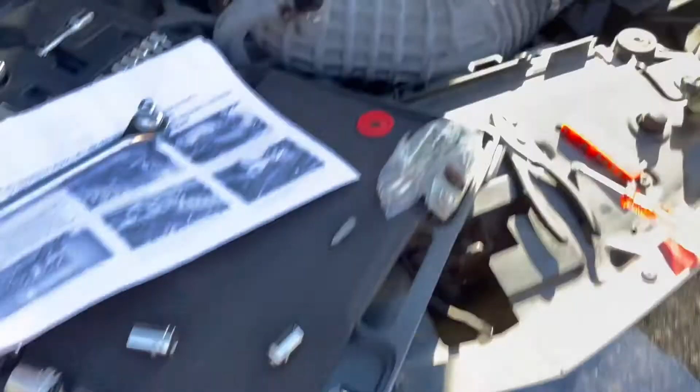So the first thing we're gonna do is take out the clamp, and you gotta do this, just like this. There's two clips, one right here and then the other one right here. That's the third step.

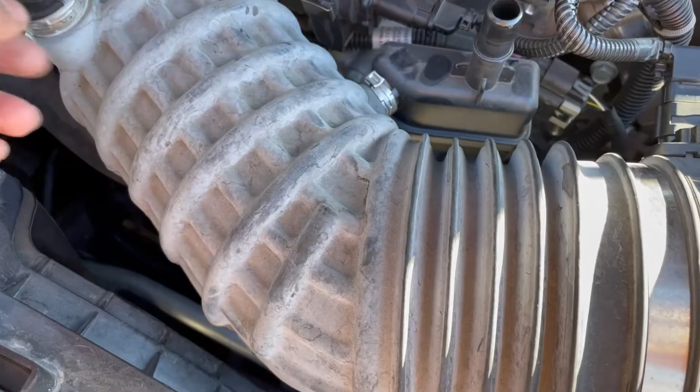Oh, this one, and then after that you get a wrench, this I call it a wrench. You gotta put it right there.

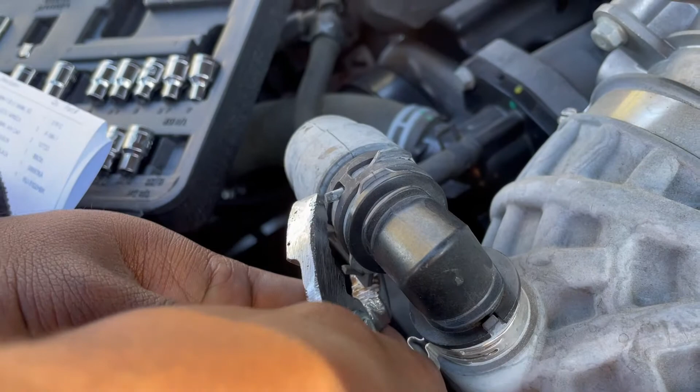It's easy when you get two people together. So he does that, and then I pull it out. There you go, it's going out. Go, there you go.

And then the next step, we're gonna get one of those little T20s, and we're gonna start taking off the air sensor.

I'll show you. We don't have the wrench, that's why, huh?

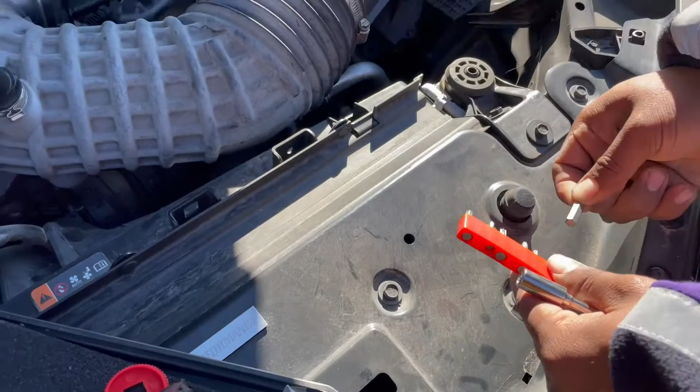Okay, hold up. So now you need a straight one. Now we need a straight one.

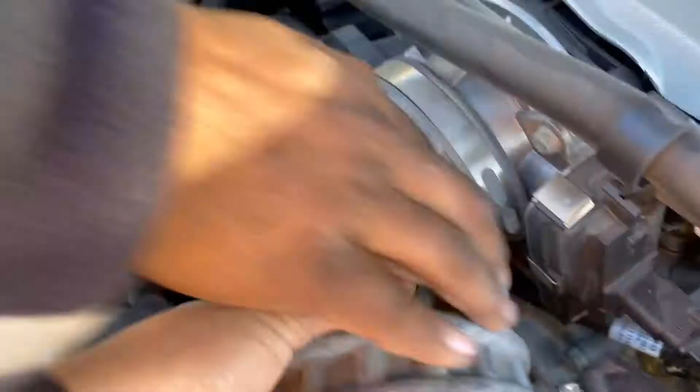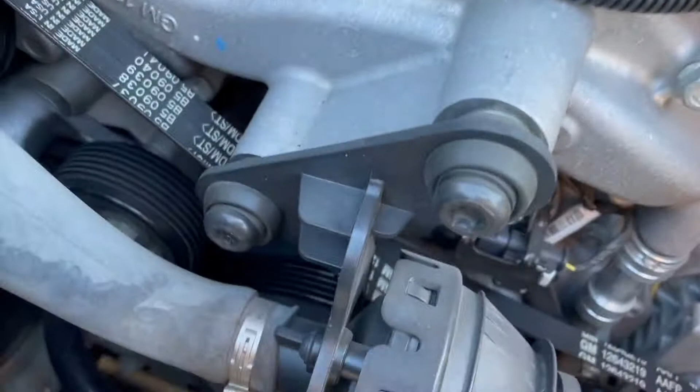So the next step, we're gonna take those two screws right here, get rid of on the engine.

Alright, you have to clip this. There you go. All I have to do is pinch this, pick up the thing a little more up, and then it comes out, because this is basically connected to this. And it doesn't let it come out. See? Because it's not even broken. It's not broken now. So the next step is...

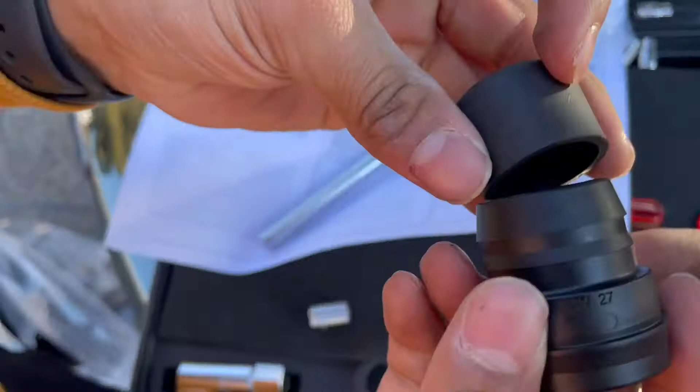The next step, we gotta put in the sound tube. So this is what we have to put together like that. We'll put it in because it has to be the sound tube.

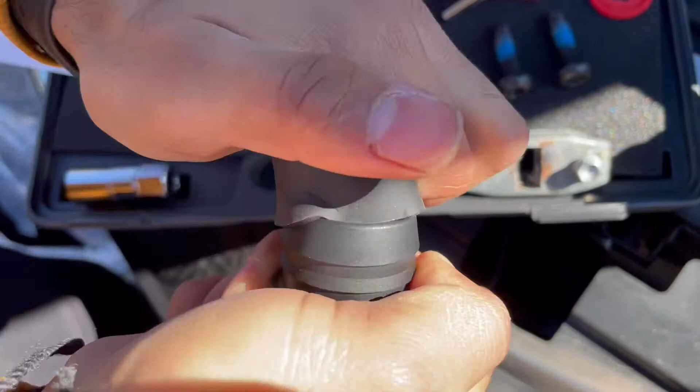It has to come in. There you go. And then you put it right there. Put it in here.

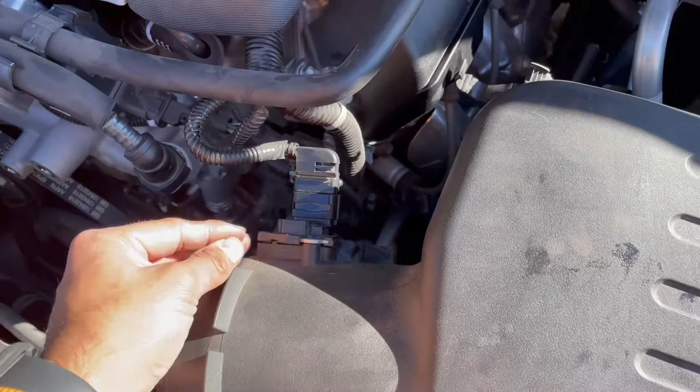So now the next step, we're gonna take off the intake, the whole thing. So once we take the intake off, that's gonna give us a chance to take the sensor off, because it's kind of hard if you just take it off like that. We don't want to damage it. So that's why we're gonna take this out first.

This is pretty helpful when you have a power tool. I'll take this out real quick. Yeah, about to come out. It's already out. It's helpful because your thing doesn't break.

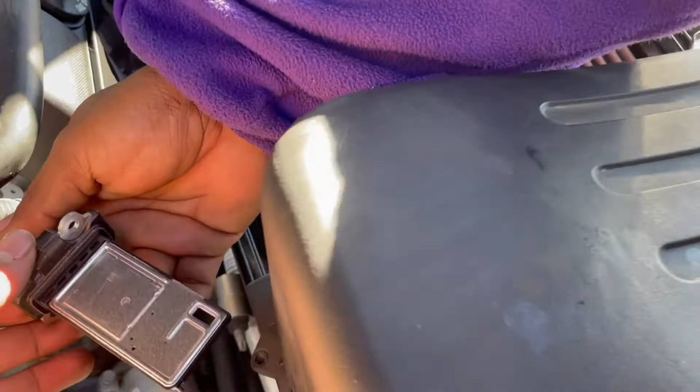So next step, we're gonna have to install the... oh, we're gonna have to take this off first. We gotta take off the cold air intake first and take the sensor out. Just leave it on top here. Okay, we'll leave it. No, we can just leave it hanging. Sure, alright, we'll leave it hanging, the sensor.

So this is the one we take off. Now we gotta take this off too. We have to take the whole thing off.

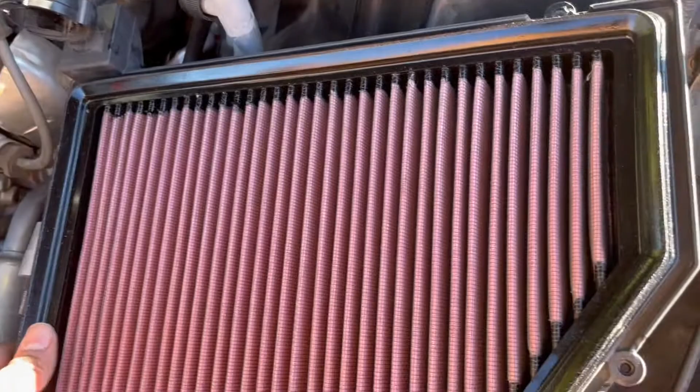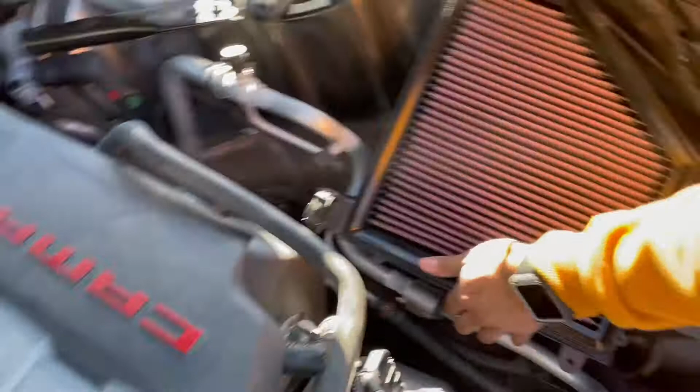Hold this. Alright, I forgot my hat.

Like that. Oh shit, it's clipped, huh? Yeah, it's not that bad. There you go, so you take it off.

Alright, the next step is to install the K&N mass air sensor into the heat shield.

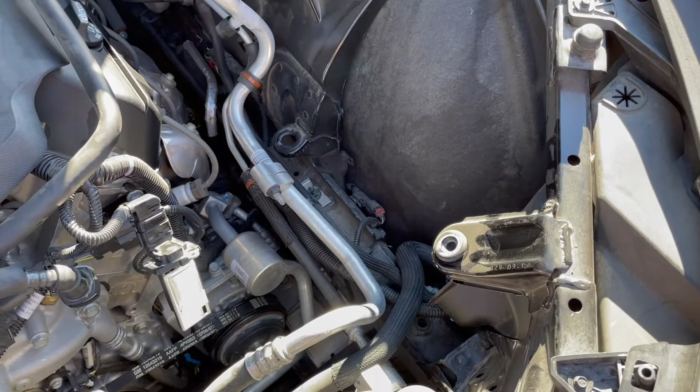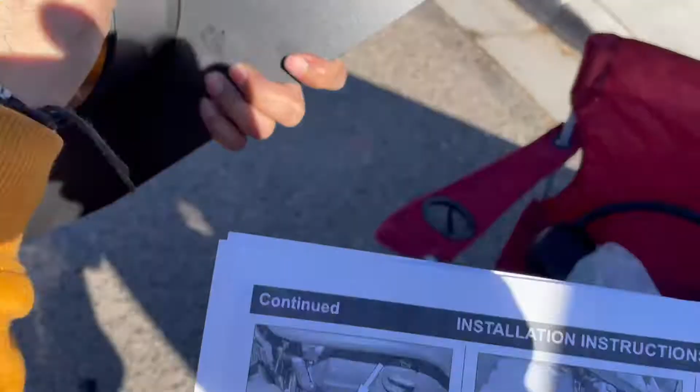Okay, so now secure it with this provided hardware. Okay, so look, this is what we're gonna do with this big old thing. You have to put some stuff right here on the side, because it's gonna be like this. Is it like this, or what size? Let me see, like then.

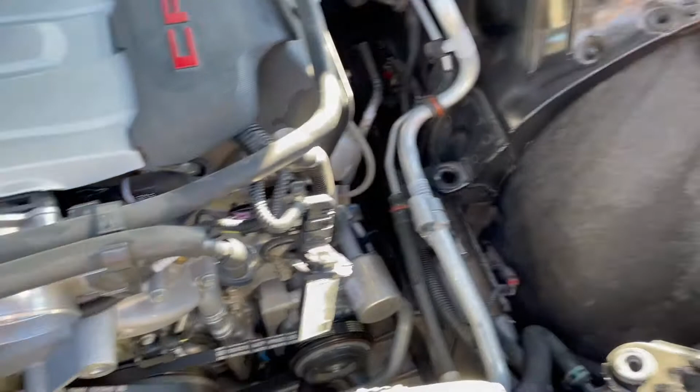Well, we gotta check first. See, put it on how it goes. First we gotta put it on. Alright, so now, because the cold intake's gonna be like this, isn't it? Yeah, like that. Oh no, is it? Yeah, because that's how it's supposed to be. Oh look, yeah, like this.

Yeah, something like this, because I see the little hole there. Right there, huh? The drills, the little drills. Yeah, it's like this. See? So we gotta install it like this, guys.

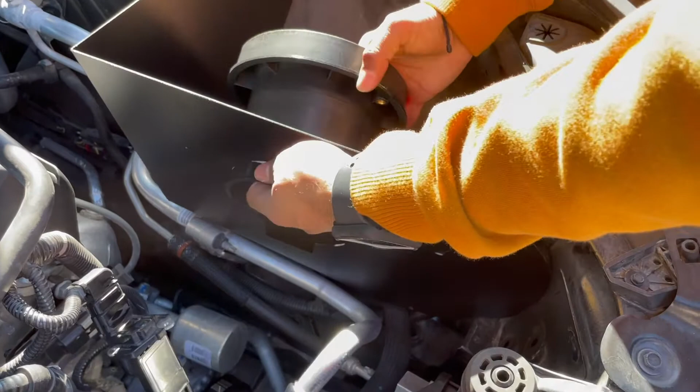You put the other one. Is it this one? Yeah. Oh, it's up like this? Yeah, like that, and then just flip it right. Also it's supposed to be like this. Yeah, like that, because you see the bolt? Yeah, right there, the sensors. Okay, so it'll be helpful like this.

Do you have the screws? I think they're over there. What size do they have to put? The screws right here, these ones? Yeah, but it's a lot. Oh yeah, hold this, okay. So we gotta screw those right here.

Those right here. This one down there too, right there. There you go. Don't screw that.

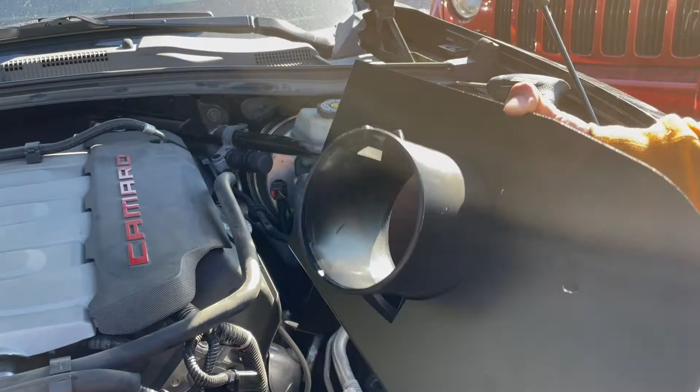I think you do one of these like... Alright, there it is. Well, what is this? So we already put this one in already. So the next step we're gonna put is this one right here, it's a bolt M6, it's basically like a...

Yeah, oh, we have to put them together though. But first, the first one, the little one first, a little washer, 6mm. Yeah, see, you put that one. There you go. Now we're gonna put it back in there.

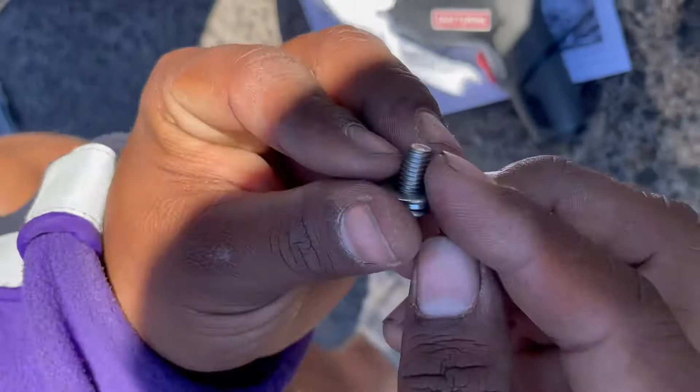Well, you got some crusty heads. There you go, there you go. Just do the little power tool. The power tools are really good, but...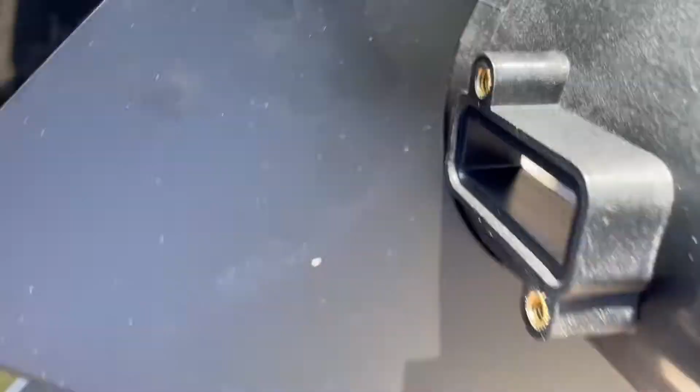Hold this, this, yeah, let's be like sideways. Need to pick it up. So now we already put it like this. Look, compared to the old intake to the new one, it looks hella different.

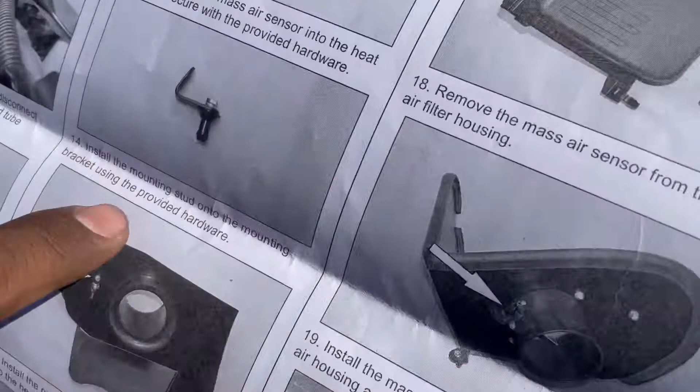Alright, the next one is basically this: install the mounting stud onto the mounting bracket using provided hardware. It's right here in the bottom. So the next one is this one right here? Yeah, this one right here? And what else, a little funny thingy.

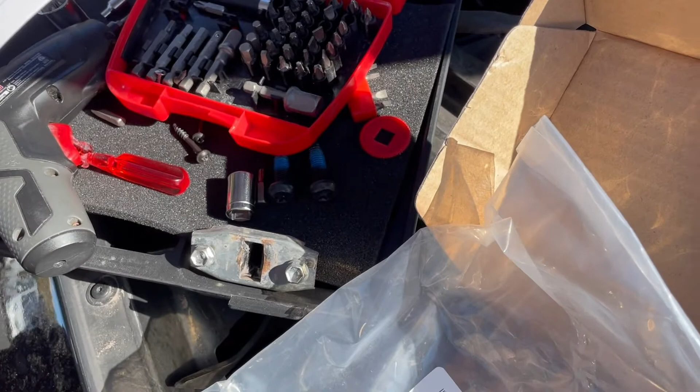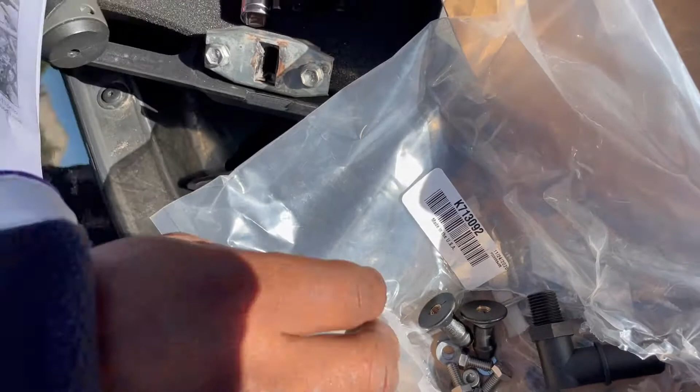I think it's this one, no? Yeah? One of these. Oh yeah, it has to be like this. Then you just put the drill on top. Yeah, I have to put, I think it's one of these. You can tell, put it in there.

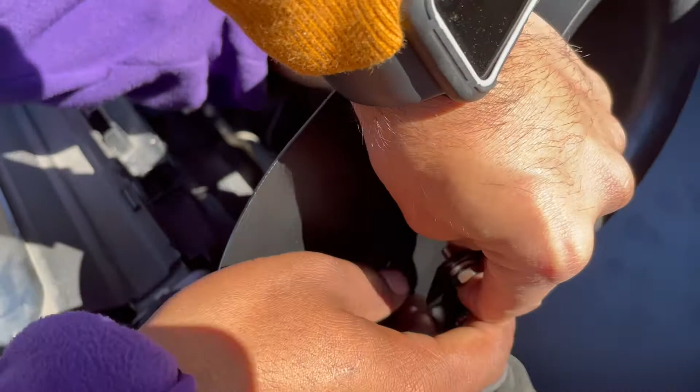Alright, so there's gonna be like this, this thing with this thing, we're gonna put it like that, and then we're gonna put it inside here. So put it in there. Hold it, yeah, and then we're gonna have to put the first one, the little one.

Okay, now. So you start from right here for the rubber band one, and you gotta just give it a little bit. Push, push, because it's kind of hard.

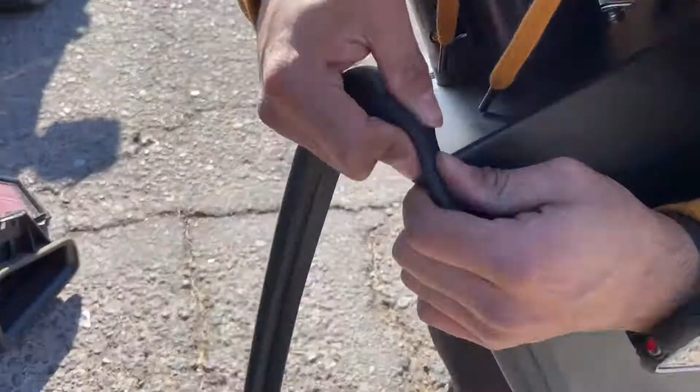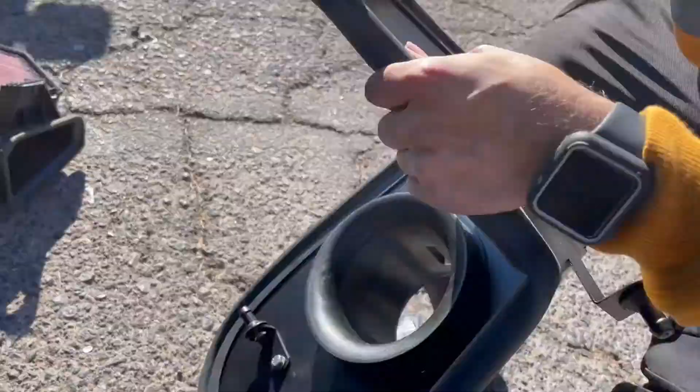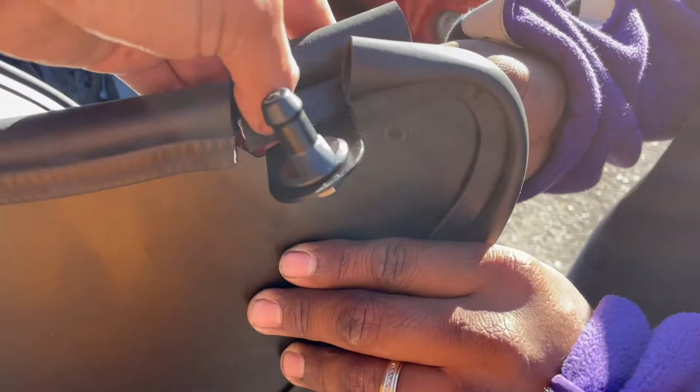We had to cut some from right here because it didn't fit, so we had to cut it. It's also in the manual too that sometimes you gotta cut it. So we cut it with a knife because we didn't have scissors, just to get a better fitment.

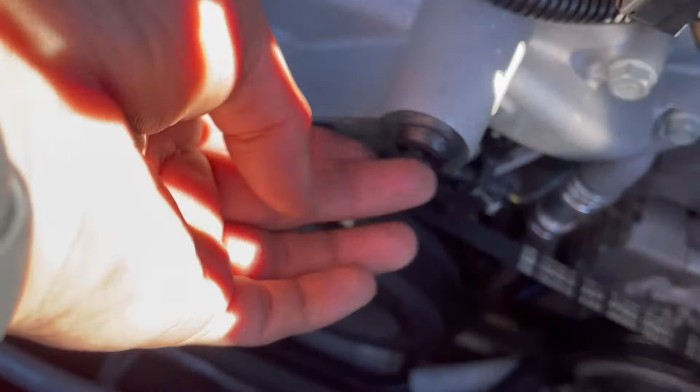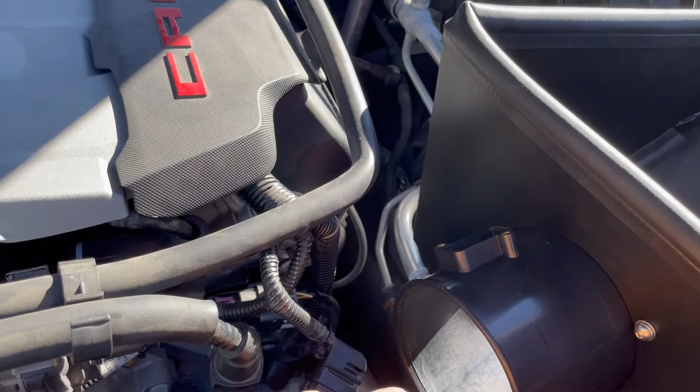Alright, so now after that, you connect the airflow now. This one? Oh yeah, we have to connect it. We should have put it in before. Hold on, let's go back. Hold on, oh you can still fit it in there, I think. Yeah, I'm gonna just take it out a little bit now. Hold on, I don't think you can. I'm gonna take it out a little bit? I take it all the way out. We have to go back out again because... hold on, that thing. There you go, okay, there you go.

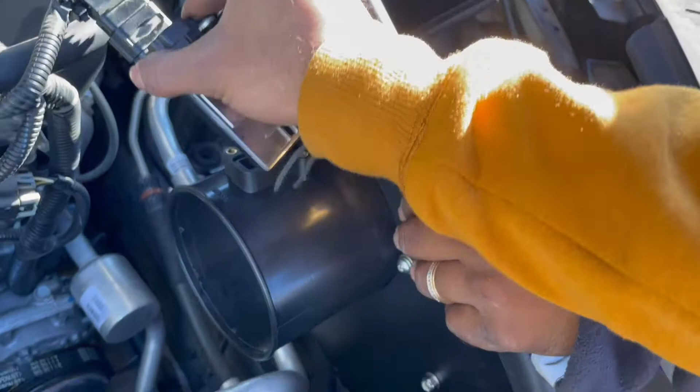Alright, I'll do this one now. Move it, show it up. There you go, so I have to just put this down. Go, try to put it. Push it this way. We have to put this first. Push it, there you go. Now we're gonna just install the stuff after.

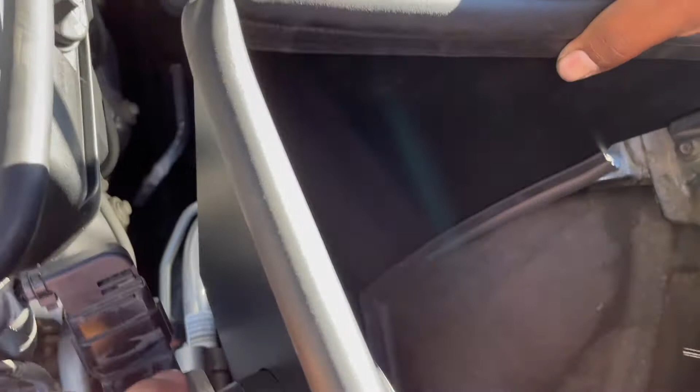Just clip it on, that's it. Clip that one right here. Clip on already, oh shit. Clip that one, and there, this one. So that's all good, now we're just gonna clamp the bolts up, and then we're gonna go for the next step.

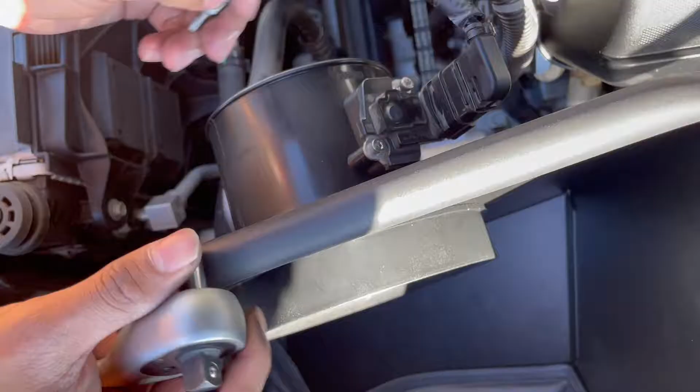There you go. Oh damn, that means you're already good? Yeah, it's good, okay. So that was the first one. This is the last part, and then that's it after that.

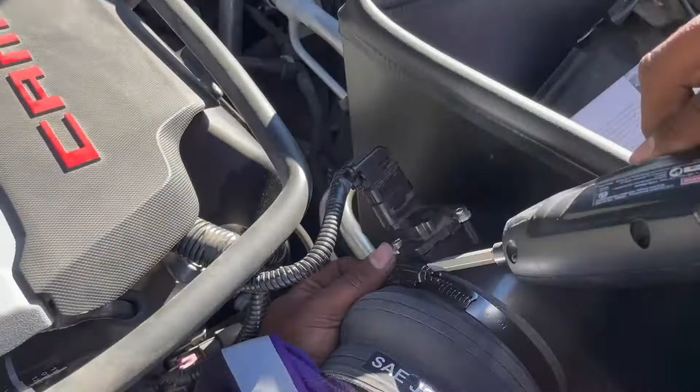Next step is the K&N thing right here. Aren't you gonna put this first too though? This one? No, not yet. It should be first though, cause you have to put the tube in. Install the provided 90 degree PCV fitting into the K&N intake tube as shown.

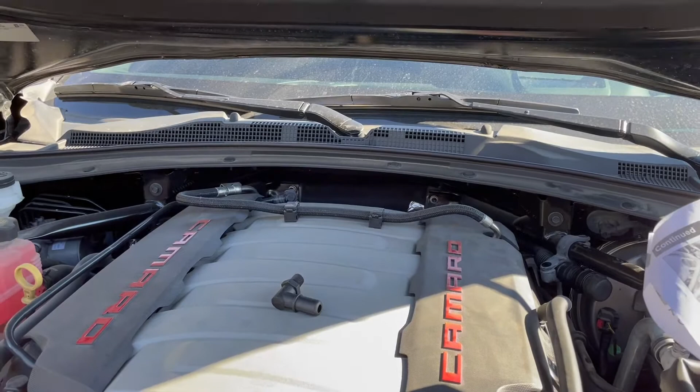Okay, so now we're gonna put that, now we're gonna see how. Oh, it has to connect the tube right here. It's supposed to be like this, isn't it? It has to be up? Yeah, technically up, okay.

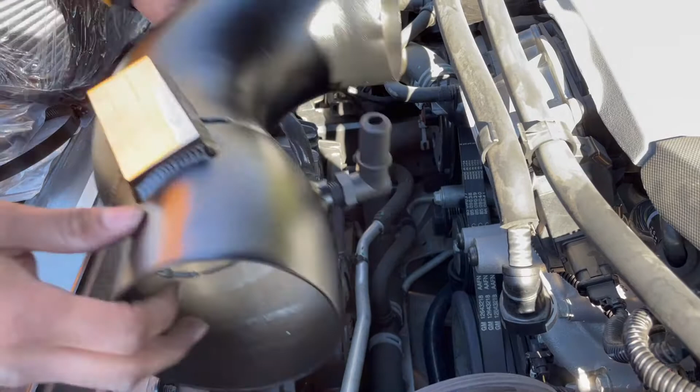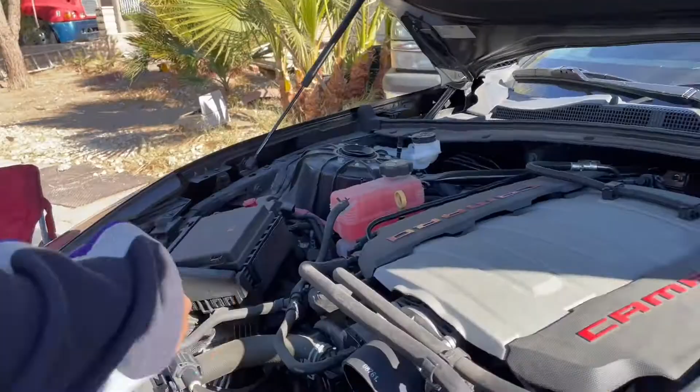This one's supposed to be different too, Carlos. Huh? Is it different? Yeah, wait there.

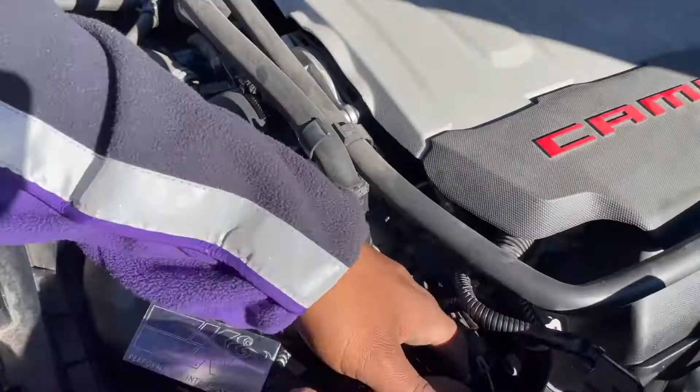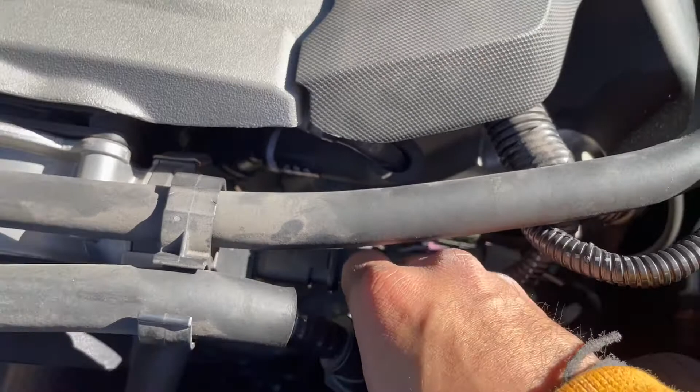Alright, so now after we install this, put it all together, all snug and good. Put the clamp on this one back to the other one, the airflow. So whenever you're gonna connect it back, just remember there's the clamp right here, so you gotta press it hard and then push it down. Once you hear it click, you're good, cause if you just try to push it in there, you might hurt this little clamp right here, and it's really important because that's the thing that holds it.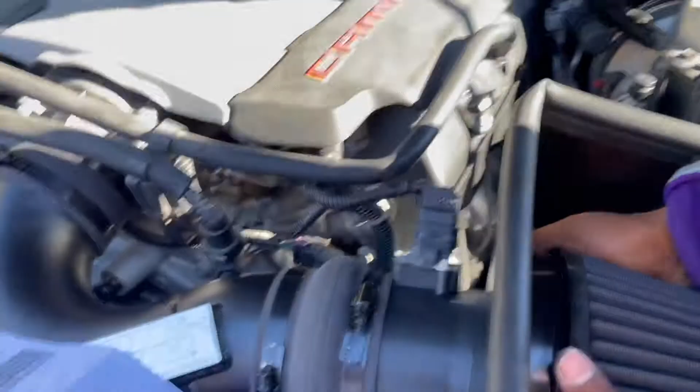And then the next one is gonna be the last part. The last part is gonna be this, just connecting in. This feels cool. Yeah? Yeah, because you're technically done. It snugs in there? Yeah, and you're technically done, look. Yep, that's the best part, just knowing you're done already.

See, and the last step is just reconnect the negative battery. So we're good now? Yeah, we're good, alright. That was good, let's do the back.

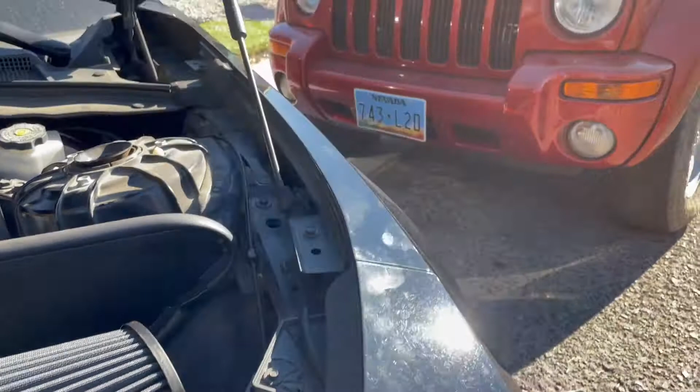So it's a size 10, remember? What's up, a size 10? Yeah, alright guys, you're ready. Let's go to the back, connect the battery. We're gonna connect the battery, and then we're gonna show you the startup for it. Okay, we'll be back, alright then.

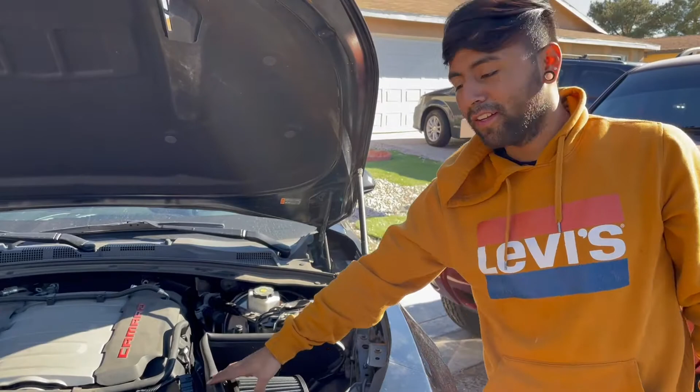So we already finished the installation of a 2016 Camaro SS K&N Blackhawk Cold Air Intake. So we're gonna turn on the car and see how it sounds. So here we go.

A lot quieter. It's quiet. There you go, oh God. Wait, put it on zero.

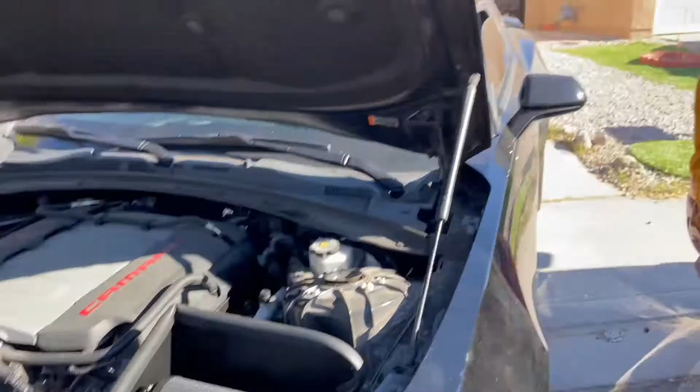So this installation for K&N Blackhawk, and hopefully it gives me a good response. We're gonna get some little revs on it to see how it sounds for a new one. Just gonna let the car cool on, let the oil go around the engine, then we're gonna do the revs.

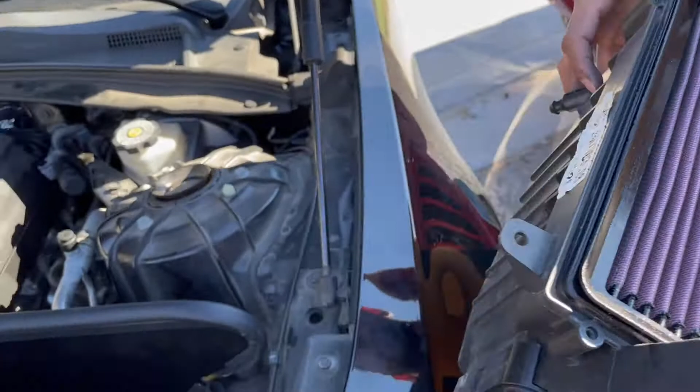You know how your other one used to be there? It used to make a little noise, that's one. Now like this one, that's like this one right here. You hear it, right? Like you hear it, no? Yeah, it's a lot smoother. Yeah, you can hear it now though, more. What about revving it?

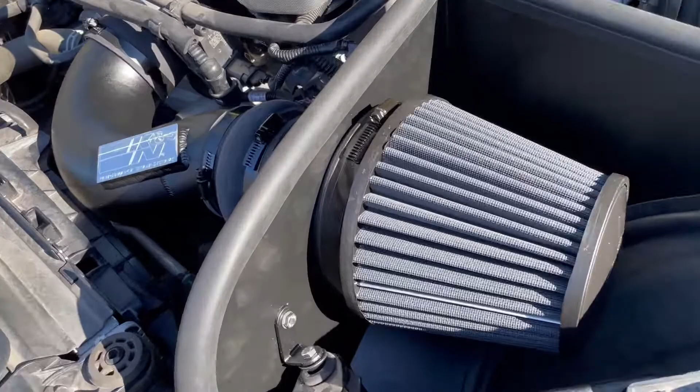Here it is, and then let me hear the back, the exhaust. Want to? Oh, alright, yeah. Is it ready for the exhaust? Yeah, sounds way different.